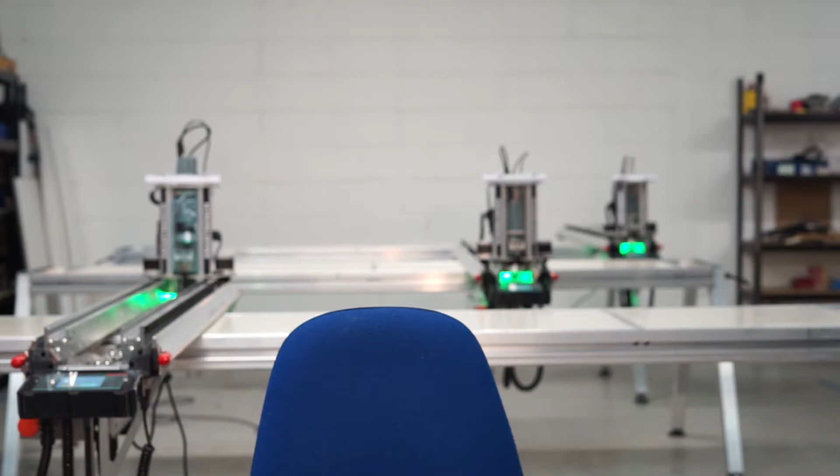Sorry, mate, I got your chair back on the mark. Is that about right? Yeah, that looks about right. Okay, it's the first time I sat down all day, you know. Right, let's go.

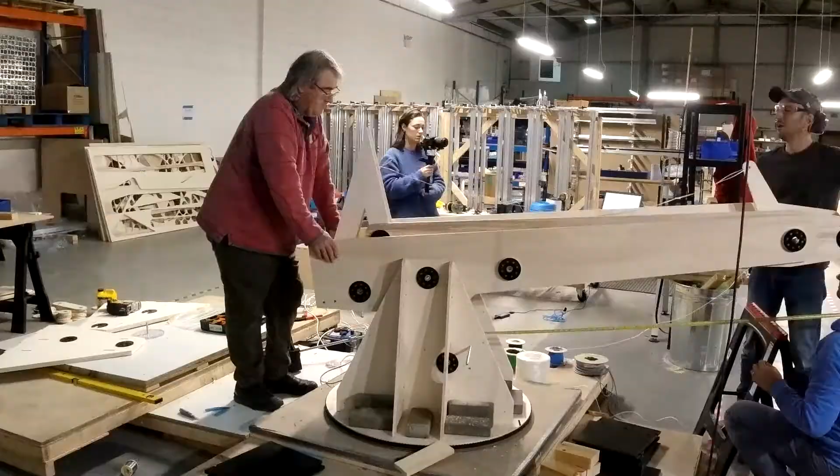My name's Ed, and I'm the technical director for Yeti Tool. That means I set the technical strategy and make sure it happens, and, you know, other businessy stuff. But I'm mostly here for the engineering, I love that bit.

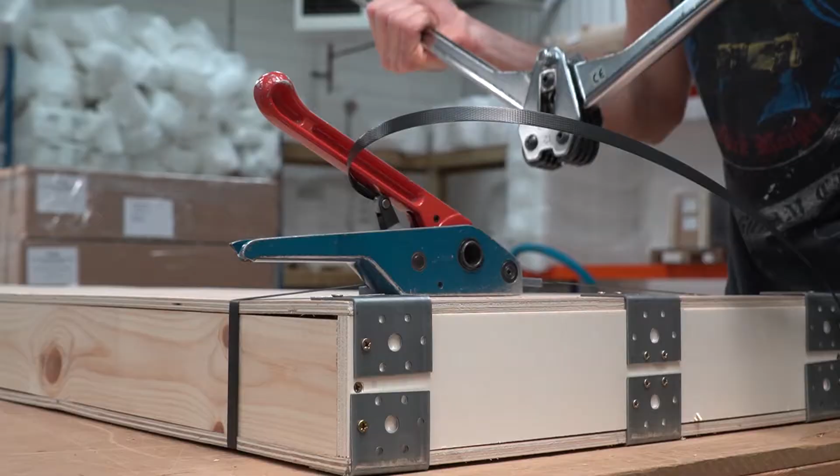We make a CNC machine called SmartBench, and we suddenly realized in October last year that we were about to make our 1,000th unit. So of course we thought, well, we'll have to have a party. We all eat lunch together, call it lunch club actually, and we just came out with the idea of the party and started planning.

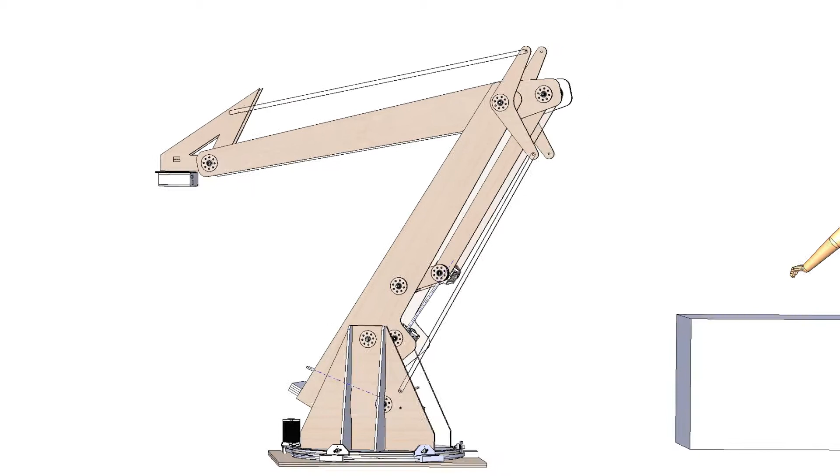We started imagining what we wanted at this party, and then I don't know how it came about, but all of a sudden we were talking about building this massive robot. Then of course the laser's got to go on top of it, and there's the DJ, so you need 2 robots now because you need one on the left, one on the right, and it just started getting out of hand really.

I remember thinking at that moment, we've had such a mission, everybody has, you know, getting through these last few years in the climate of everything that's going on. We need to have a bit of fun.

The biggest problem was that if I got this design wrong, there was a very real possibility that a big old robot was going to fall on one of my mates' heads. That was one problem. Second was, we only had a week to get it all done in and make them. We wanted 2 of them. It was huge. I mean, it was cool, but it did turn out to be one of the most stressful projects I've ever done with this company.

And was it fun? No, it wasn't fun at all. It was a really terrible idea. If you're ever going to have a big party and you get that urge to build a robot before it, just don't bother. Yeah, don't bother.

So a key design principle is I want to make everything on SmartBench, you know, CNC routed on our own machine. SmartBench can cut up to 2.5 meters long, so I'm thinking if we have 2 arms, then that could reach 4 meters. Now, if it can reach 4 meters, it can reach the tiles on the roof of my house. I'd be well happy with that.

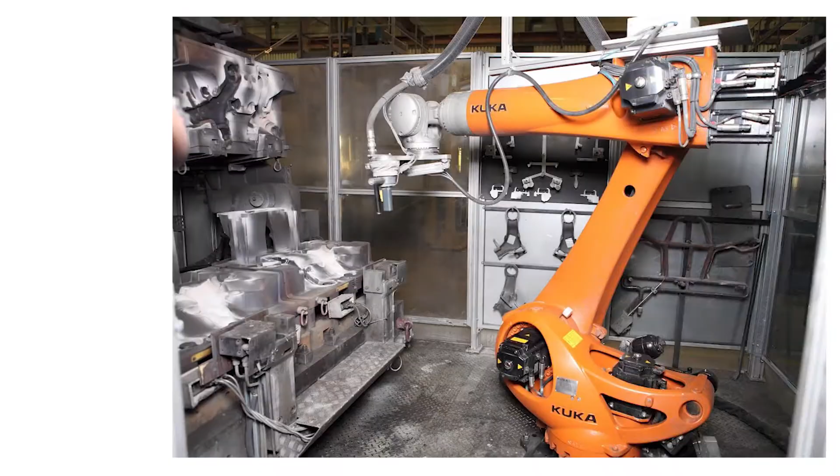I think the reason you don't see robots this big very often is because the bigger they get, the more expensive they get, and they get expensive really quickly. If you see the robots in a car factory, it's because they've got all these motors distributed around the arm. That makes them really heavy, so then they've got to use strong metal alloys to support the load, and then that gets heavier, and it just gets out of control. It gets expensive really, really quickly.

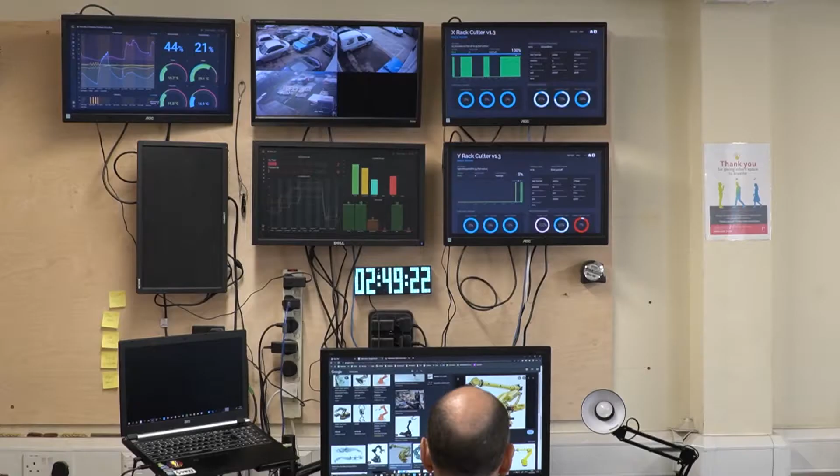So my job as the designer is I've got to deliver this and balance everything, but try and keep it as cheap as possible. It's a robot for a party at the end of the day, so the budget's not massive here. To be honest, at this point, I have absolutely no idea how I'm going to do the mechanics at this stage. And then it hits me.

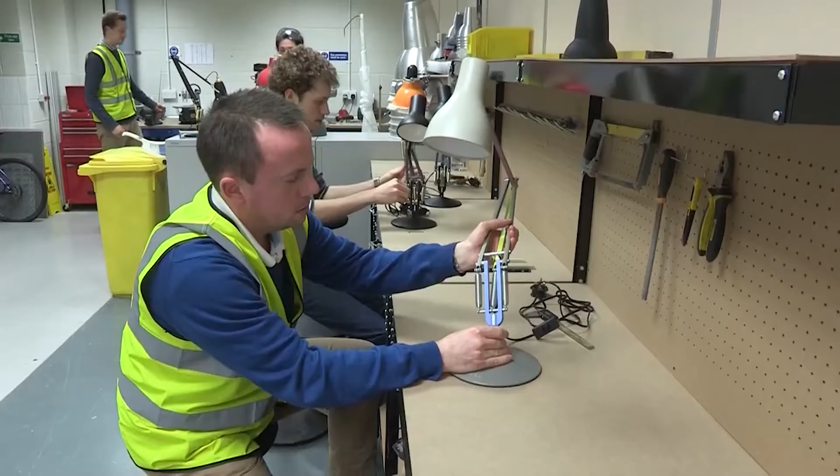I just see the Anglepoise lamp on my desk, and I think, yeah, I'll just rip that off. The Anglepoise lamp is quite clever. It was developed by George Carwardine - I think that's how you say his name - but it was in the 30s. He was a Brit, he developed it in Bath. Effectively, it's very efficient because instead of having all these actuators off on the arm, it puts all of them down at the base, all the springs right at the bottom.

And that's good because now they're not on the levers, which keeps all the weight down. So all we have to do is swap out the springs for motors, that'll move it up and down, put it on a big bearing so the whole thing can spin around, and make it 10 times bigger. Easy. It's so not easy. Back to the design - when I'm designing, I've got these basic principles in mind.

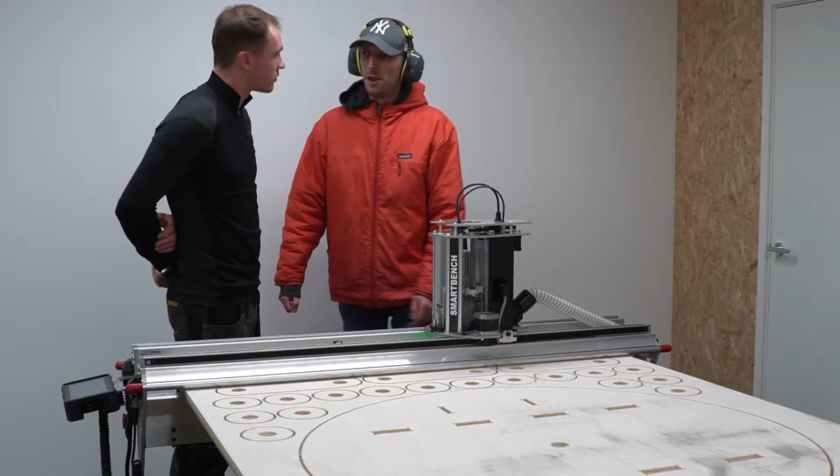The whole structure, I want to make it out of poplar ply. It's available in large sheet format and it's very light. The only downer is it's weak, you can snap that off easy. So I have no idea whether it is actually going to collapse or not until I actually do the design.

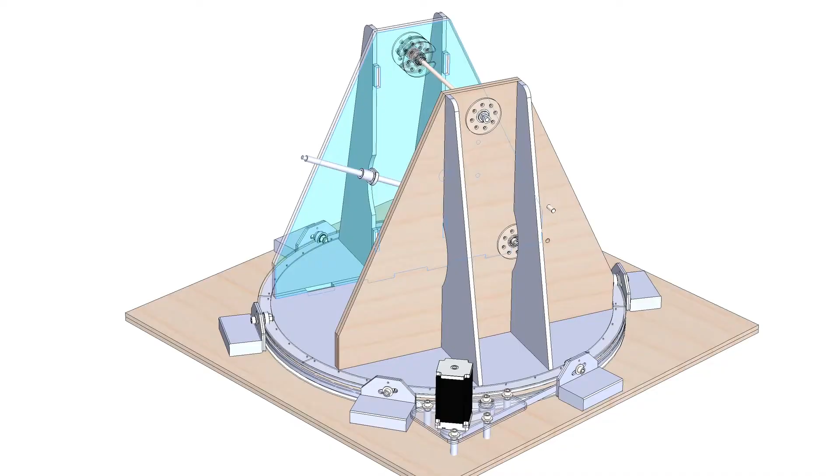We'll see, I guess. For the design itself, we've got 4 axes. The one at the bottom is spinning the whole robot around. Then you've got another axis lifting the lower arm up, and a third axis lifting the upper arm up. And finally, one at the top spinning the laser around, which counteracts the slew bearing at the bottom, so the laser's always pointing at the crowd.

When I'm designing stuff, and it must be the same for everybody, I just have this fear of it breaking all the time. And the biggest weak point for me is the pivots. So you've got all the weight of the arms trying to shear through the wood, and I don't know how to cope with it because the poplar ply is weak.

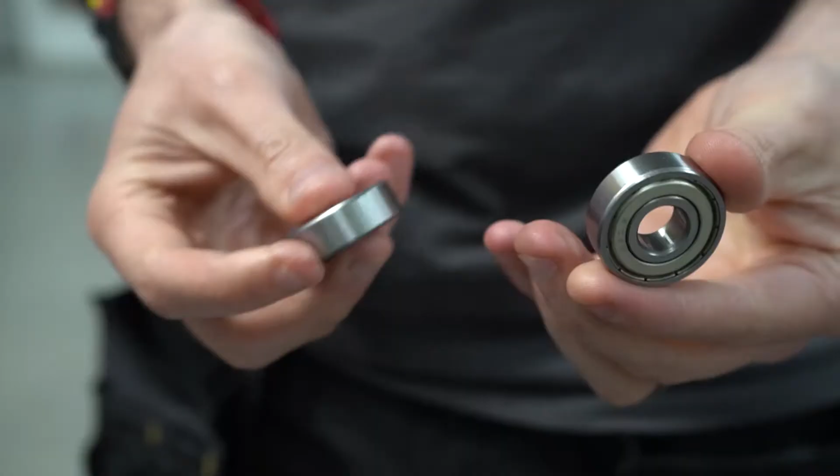So what I go for is some large bearings, which are massively overrated. They take M12 bolts, but the point is they help distribute the load because they've got really fat outer races. I think that's gonna work.

To drive the two lifting axes, I actually found these lead screws on eBay, and they're half a meter long. They've got ball nuts on them and tail bearings, and they're only 14 quid. Well happy with that. They'll massively gear down everything, so the motors are gonna easily be able to lift that load.

The only downer is I'm gonna have to design some quite tricky gimbals so that the lead screws can rotate and adjust. But I'll just stick some techno on, have a late night, zoning out to CAD. It's a pretty good night in.

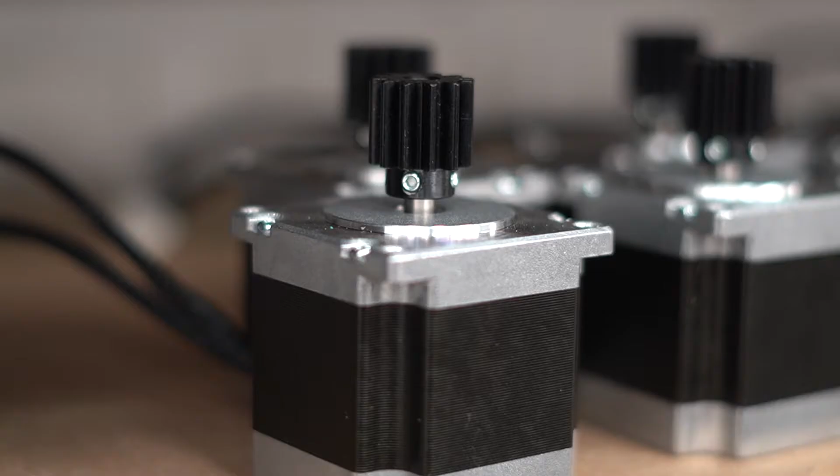On the end of the lead screws, we've got motors, but how big do those motors need to be to actually lift it up? I really want to use some NEMA 23s on the production line. We've got loads of them, but are they going to be enough? I don't actually believe the data sheets on how powerful the motors are going to be when they're put in conjunction with the ball screws.

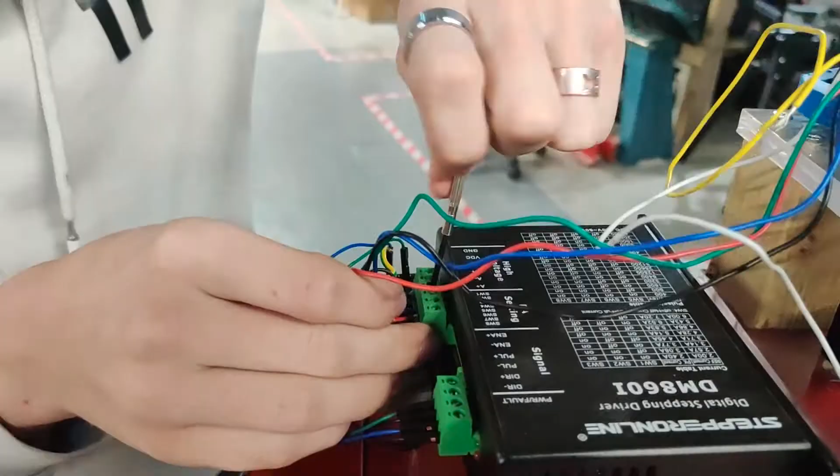And what I don't want to happen is we put this thing together and then the whole robot just doesn't move. So what we're going to do is build a load test rig. We're going to put our motor together with our ball screw and see how many kilos it can lift. We coupled the motor to the lead screw, and on the lead screw you've got the ball nut.

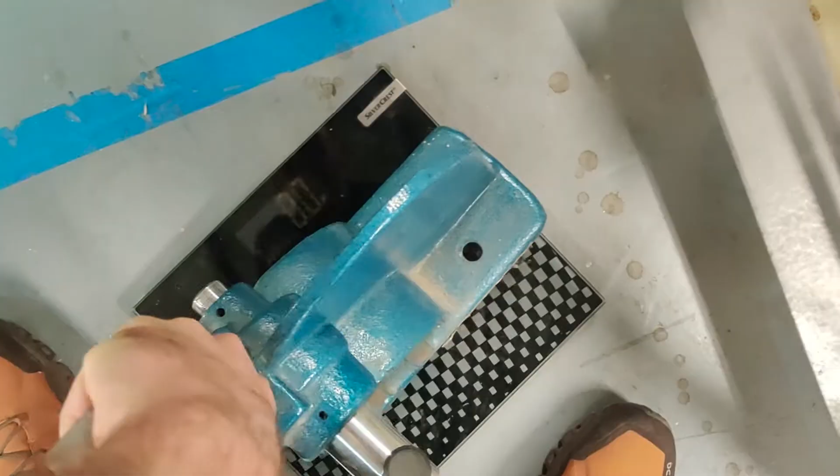We tied a bag to the ball nut, then we wound the lead screw, and that lifted the ball nut and the bag. We kept on adding weight into the bag until it stalled out, and when it stalled out we knew that was it—that was how much weight it could lift.

We tested the NEMA 23s. They actually did really well, 40, 50 kilos, something like that. But I did the calcs on how much we would actually need, and it came back at about 80 kilos.

So we then had to invest in the next size up motor, NEMA 34s, like proper chunky motors—you could move anything with these things. We plugged them into the test rig and just kept on adding weight. It cleared 100 kilos easily, and then the bag broke.

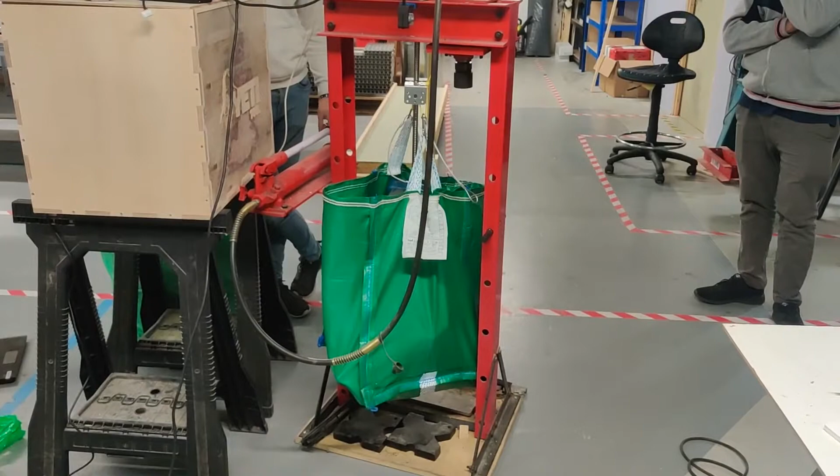Is the bag breaking? I've got no idea. Some of it broke. So we had a lot of confidence in these things, they were going to do it.

Anyway, that's testing, we don't have to talk about testing. Let's get to the design.

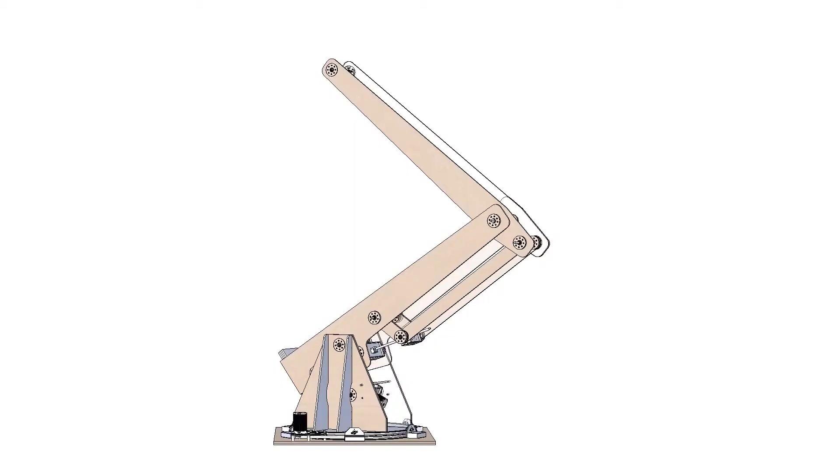The first part of the design challenge was actually the turntable. And that's got to do two things: it's got to let the whole robot spin, and it's got to not let the robot tip over, because nobody wants a 4-meter robot falling on their head.

The whole turntable's so big, the whole thing's just floating, which is why it can completely tip up and over. And as that lever, the arm, extends away from the middle, that's what's tipping it over. So I need to bring the center of gravity back into the middle of the base.

Because I really want to get this right, I give my mate AK a ring. He actually designs nuclear cranes for a living, so you know, can't go wrong there. He says that's actually pretty common in cranes. In fact, they're mostly on floating slew bearings, and industry standard is to get that center of gravity to within one third of the bearing's radius.

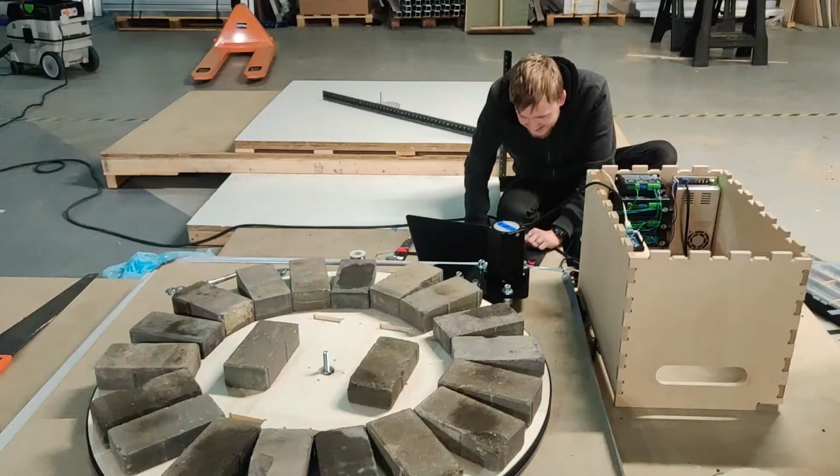So we can do that with counterweight, and in our case, that's bricks. Now we've solved that problem, it's time to make the turntable do what it was supposed to do.

You know, turn. So it's back to eBay, and I start looking around for anything I can use for the top turntable to roll on. I find that precision bearings are hideously expensive, but along the way I see catapult ammunition, which I suspect is exactly the same thing, just rejects from the production line. I got like 1,000 of these just to see if they would work. They're cheap, you know, why not?

Look, I don't really mind if they're off nominal at all. If you look at that, it's way off 10 - I suppose it's supposed to be 10. But if you look at all of them, they're all the same. Look at that, 9.5, pretty much on the money. That's fine, as long as they're consistent.

Ben, do you want to make a robot, mate? Let's go!

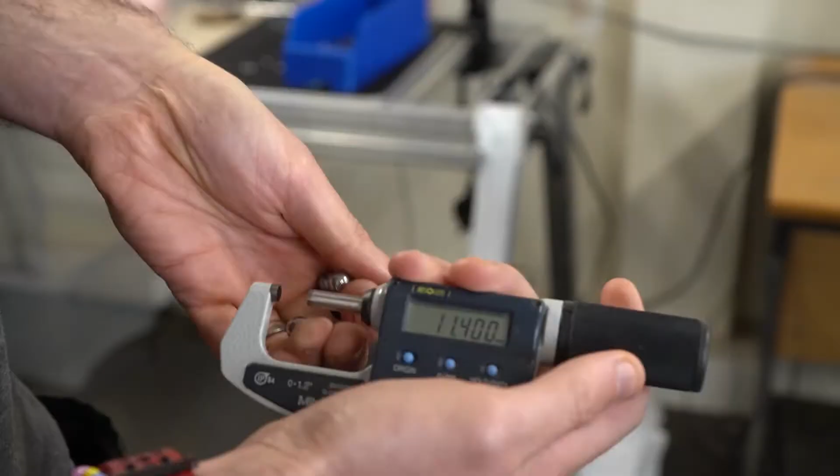So now I've got the balls, I want to cut some tracks into some acrylic. Now I've got the tracks, I can put the balls in the tracks, and then put the turntable on top of the balls, and now it can spin on the balls. So it takes all the weight, spins around, it's cheap, done.

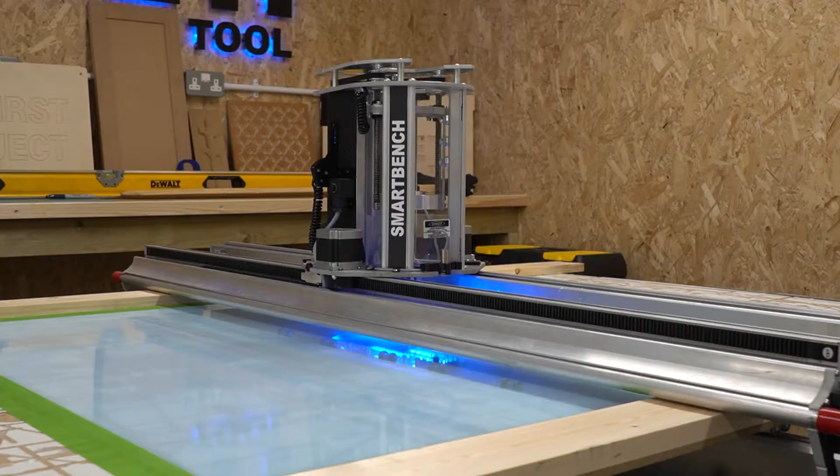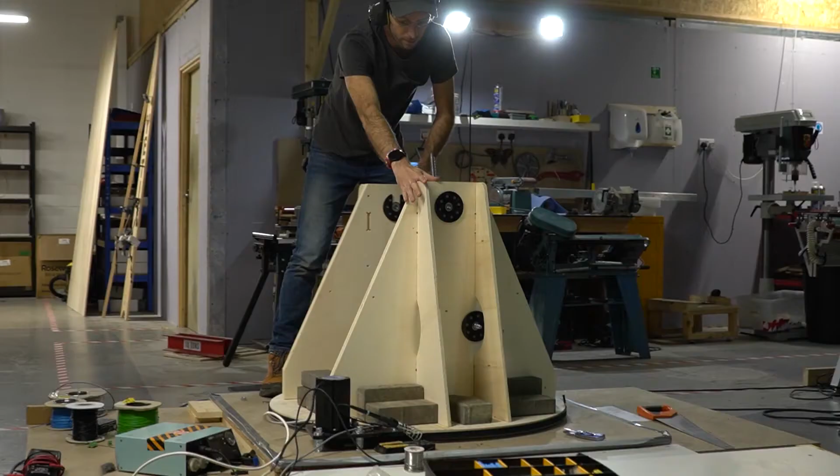A 12-hour day at slew bearing works, and I am so happy right now. Yeah, come on!

Every project has a pain in the ass moment. It turned out that the balls were a real pain. Halfway through testing, we noticed that a ball had jumped out of the track and was now sandwiched between the plates. That meant the whole weight of the turntable and the mass of bricks was now bearing down on that one ball, which meant the whole thing could seize, and just that single ball could tear everything off.

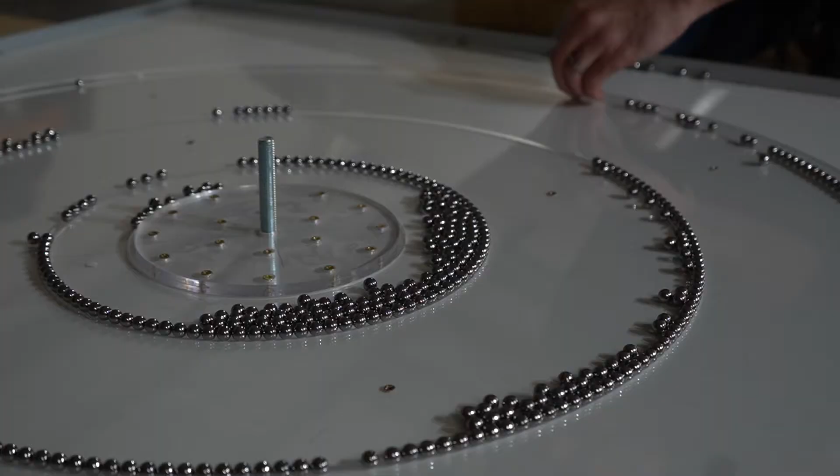We rebuilt it. I don't know what it was - whether it was the dust kicking the balls out of the track, or the mediumly violent assembly of us putting it together, I don't know - but we did it a few times and it just kept on popping out.

And then the final nail in the coffin for me was realizing that we've got to move these robots from where we were building them to the dance floor, and there's just no way they would have stayed in the track. So after all of that, it took a while, but I had to accept defeat and completely rip it up and start again.

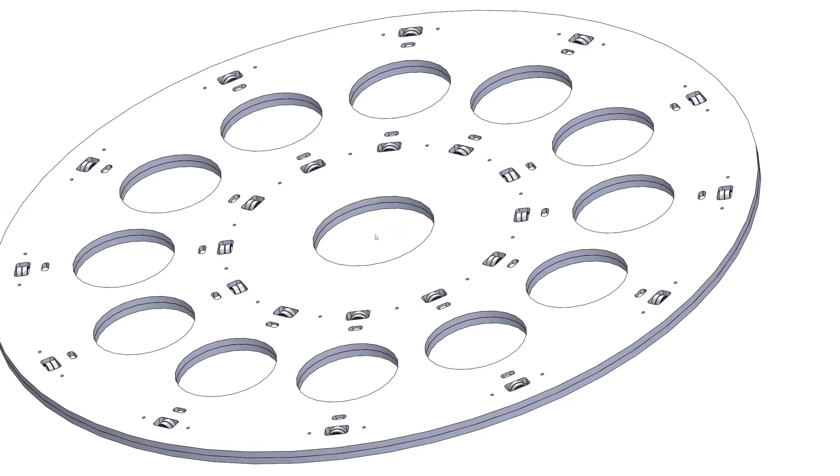Luckily at this point, Martin has a great idea, which is we use bearings instead of balls. Throw the balls away, just use bearings. And we have an intermediary plate which holds onto the bearings - we call it a spider - and as that rotates, it holds the bearings in place, which should work.

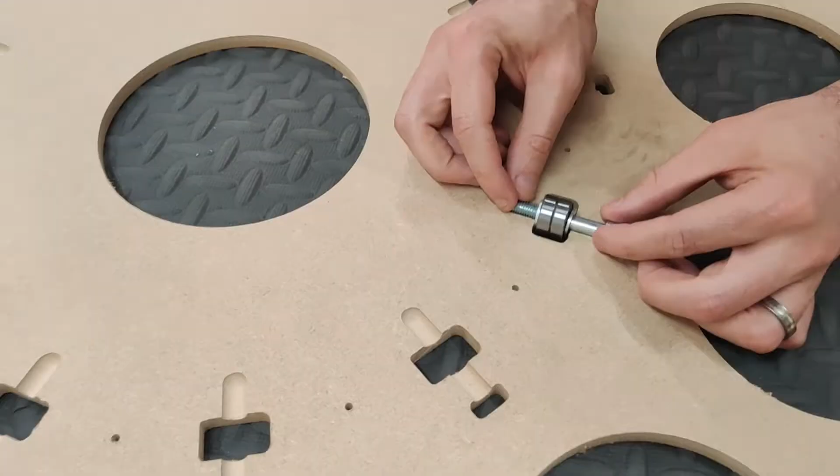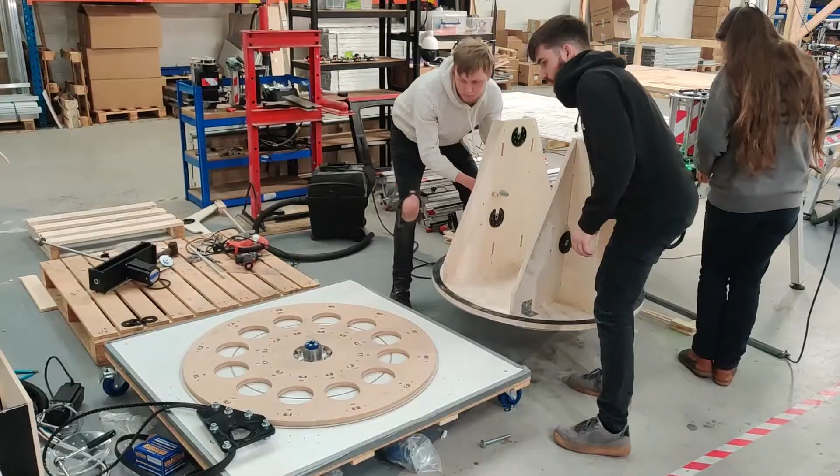So, take two. Right, they've come off lovely, and now I'm just going to test them. Yes, look at that, that's nice. We should just be able to pop this over on the top. Yeah, that's going to work. All right, turntable next, please. Yep, it's going to do it.

So now that's done, we can get onto the arm, the robot looking bit. At this stage, it's all about making the bits as fast as we can, because we've just spent a lot of time on the slew bearing. We don't have much time. We're starting to feel the pressure. We need to be cutting all the time, but we're not going to make it.

And I know I'm going to say this, obviously Yeti Tool and everything, but SmartBench at this point was amazing because it just churned the parts out. I mean, we literally could not keep up.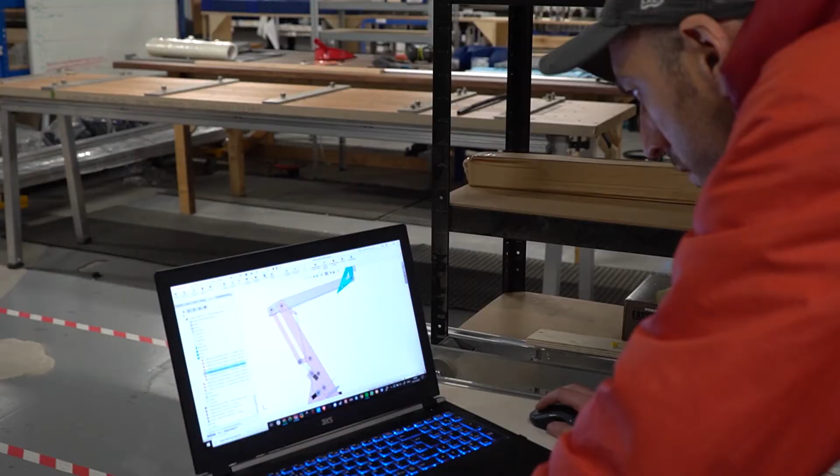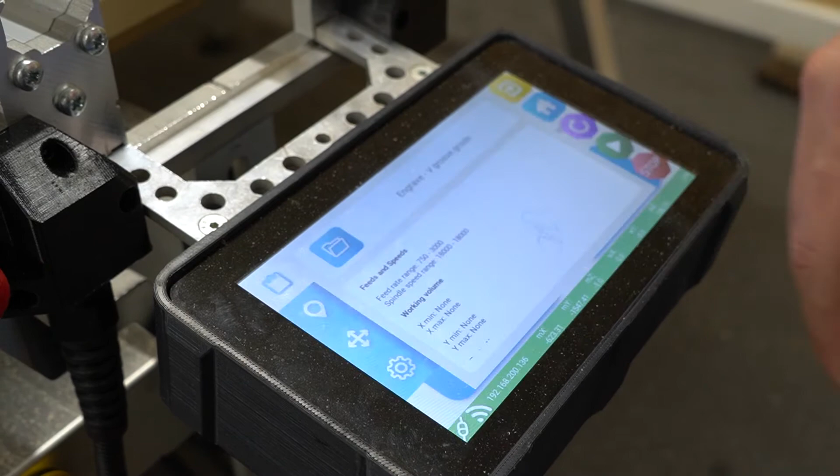The bit I loved was designing and using Smart Transfer. The workflow was: I'd finish a design, drag it onto Smart Transfer, and it would get pinged over Wi-Fi to the SmartBench, which was cranking the parts out. I'm using Smart Manager so he knows the quantities and tooling, it's all there. I don't even have to talk to him.

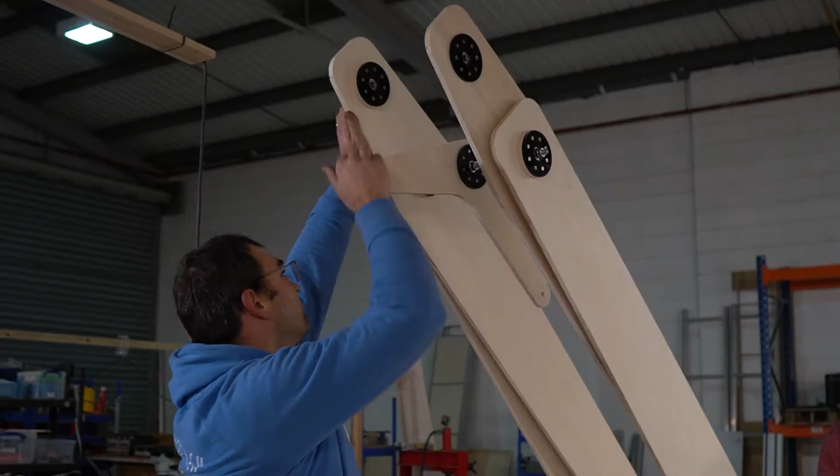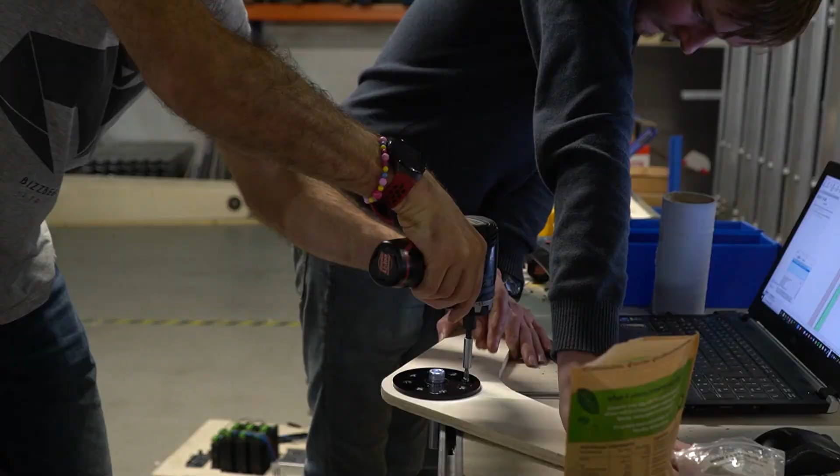Meanwhile the bits are coming into the build bay, and the guys can't keep up. We've got Rami, Benj, Dragos, Barry, Finn, Loz, all scrambling to get the sub-assemblies done. Everybody's pushing really hard, all day, all night, just trying to get these things together.

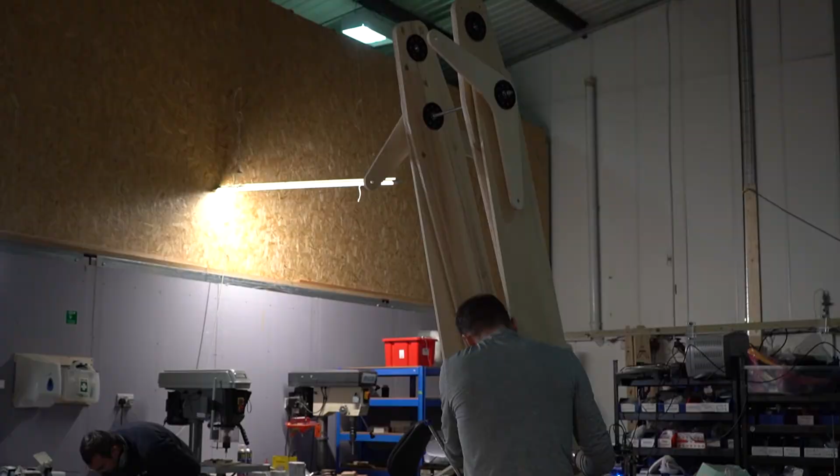It's building, it's coming together, and then we suddenly see this robot arm emerge, which we'd all been having in our heads for days. And then I hear this crack. It was one of my worst fears in the design.

I didn't know whether the poplar was going to take it. I knew it was weak. I guess I thought, well, we'll find out. But yeah, that noise of hearing the plywood starting to come apart, it was brutal, man. And we had to stop, strip it down, and work out what had gone wrong.

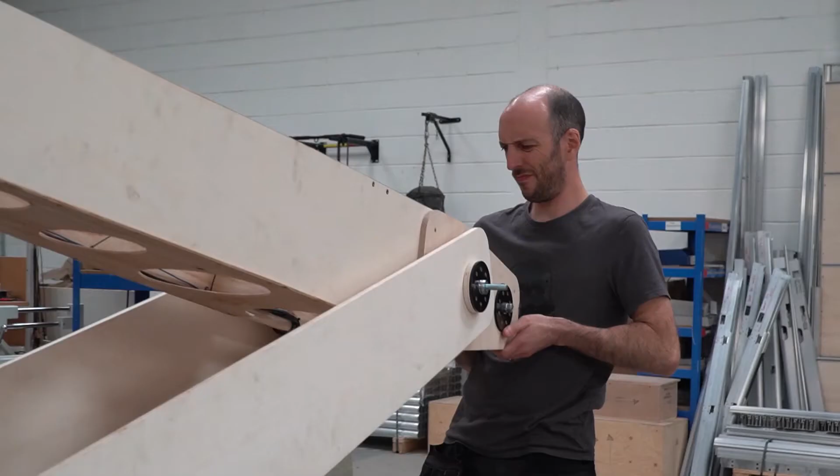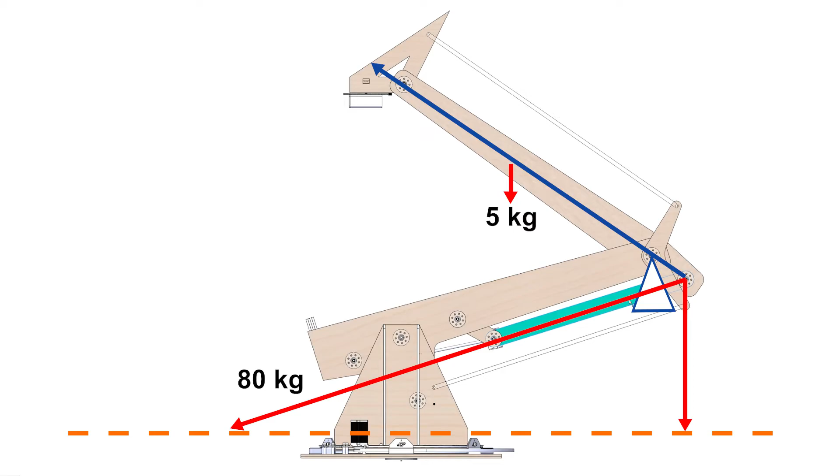I know where to look, and sure enough it's coming apart at the elbow tendon. There's a lot of force in that area. We've got a long arm which adds a lot of load, and a very short part of the lever, which means you need even more force to pull it up. To make matters worse, the tendon's at an angle, so the force pulling on it just gets more and more. Worst case we're looking at about 80, 90 kilos, and the poplar just wasn't up for it.

So we had to reinforce fast. I got to designing another couple of extra plates to reinforce it, and this time I'm using birch ply, which is much stronger than poplar. It's a lot heavier, but it's worth the weight. We glue these new reinforcing plates back in, and then rebuild the whole robot again.

We lost a lot of time. No, there is no way we're going to get this done. Absolutely no way at all. Starting to get unbelievably tired, unbelievably tired. So we're running out of time. It's midnight now on one of the last nights.

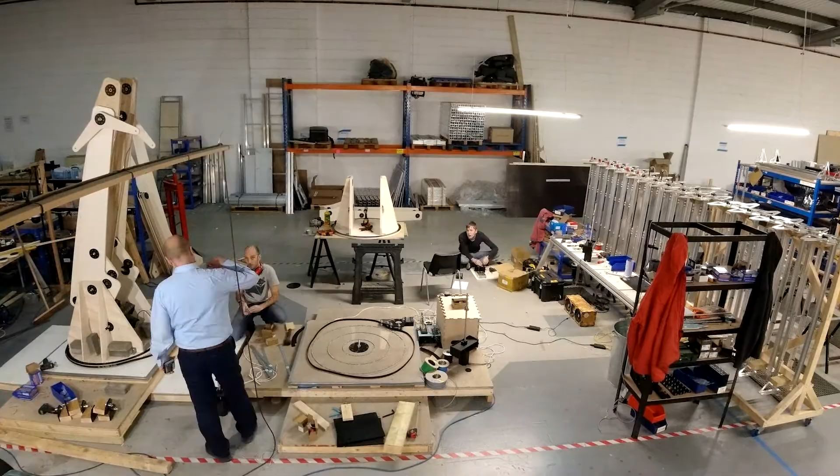I guess in every project there's always a bit of a low. We'd just been running, exhausted. I remember sitting on the kitchen floor, realizing we had a whole other robot to make, and I got this feeling that I was just pushing us all over the edge of a cliff. How on earth were we going to build the second one?

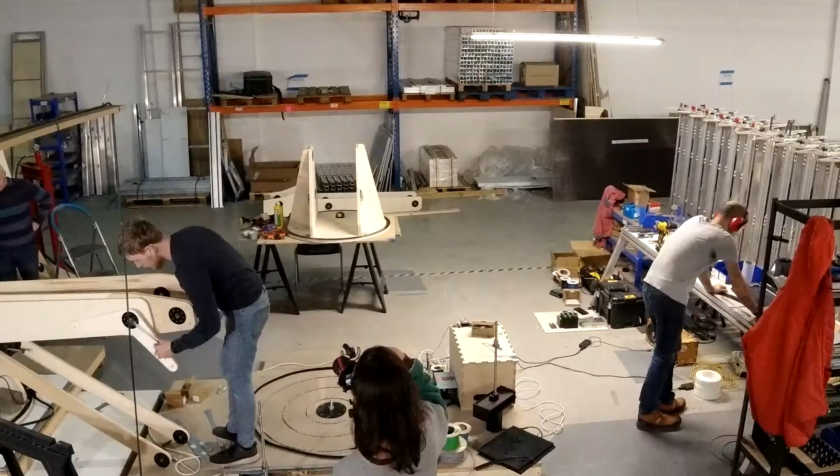I just said to everybody, what do you want to do? Because I don't think we can make two. And everybody said, no, we're making two. I was so proud of everybody. So we just cracked on. And actually I'm so glad we did, because that second robot was easy. We'd done all the problem solving with the first one, so we knew what we were doing. We didn't have any redesign. Did it in about half a day.

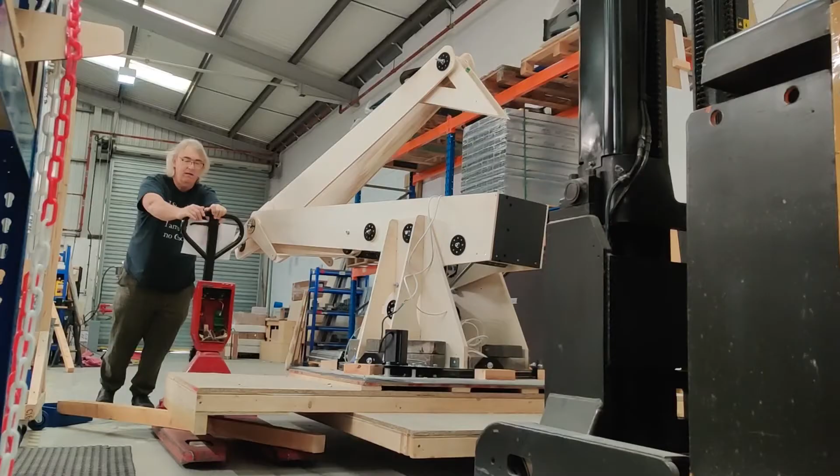So it's the day of the party now, and literally nothing else is done. Somehow we've got to move all the robots into position. To be honest, I don't even really remember how that happened, it's a bit blurry. There was a lot of squeaking and dragging noises when we got there, I guess. I didn't think about it at all, actually, if I'm honest. That was lucky. Right, well done everyone.

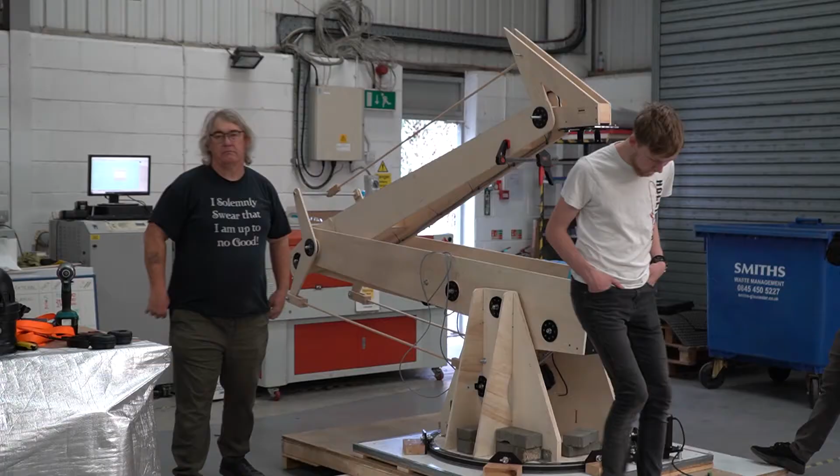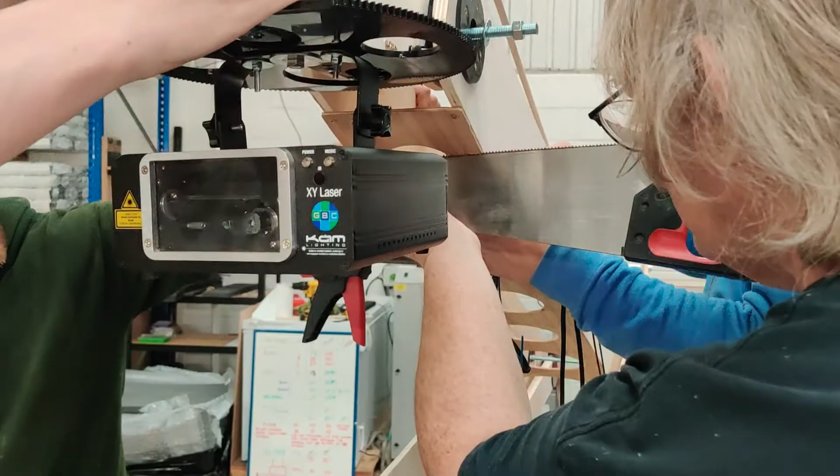Let's do robot two. That's then followed by, we've got to fit the laser to the head. That was pretty cool actually, I was quite pleased with that. We used a rack and pinion system which would allow us to swivel the whole laser on top of the robot.

And then we put the signal cable all the way down the arm, through the dance floor, out to the back, up to a laptop. So we could control both the robot and the laser from one laptop at the back of the dance floor, which was great.

That was like a dream. Now we can get these things moving and see what they can do. If they can do anything.

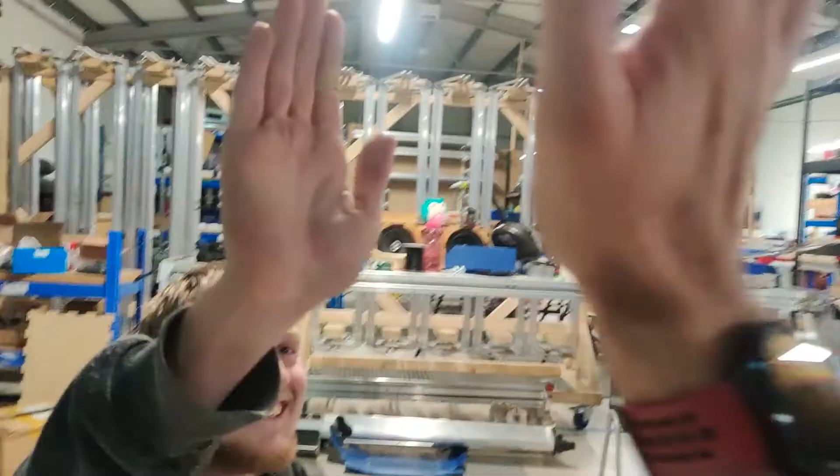So Benji, we've not talked about Benji at all, have we? Right, so Benji is kind of like my partner in crime on this project, and he's in charge of all the motion control. He's got to get this thing moving. I thought the mechanics was hard, but actually getting it moving's tricky. But the poor guy, because we spent all the time on the mechanics, has had literally no time to actually do his job. We've got barely no time left, and this is his time to shine.

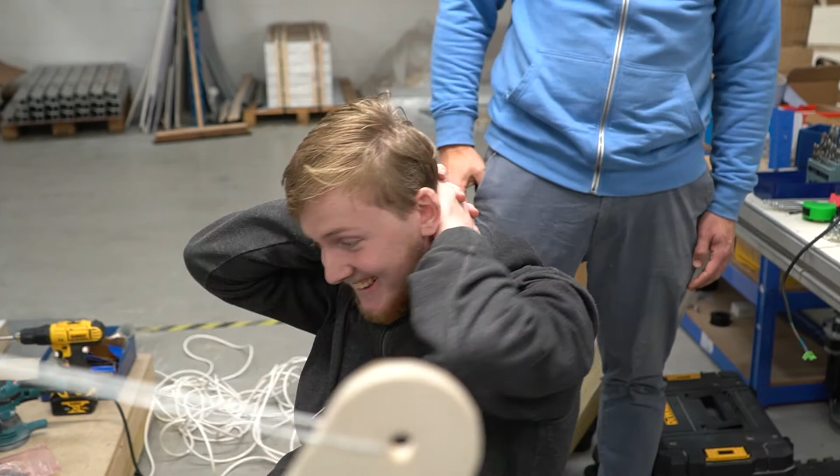Oh my god, we have a solution. Oh, what have we got? I've got two Arduinos driving two motors at the same time from the same G-code command. How did you do that? Duplicating the COM ports. Our control, by the way, for the geeks, is very similar to how we run SmartBench.

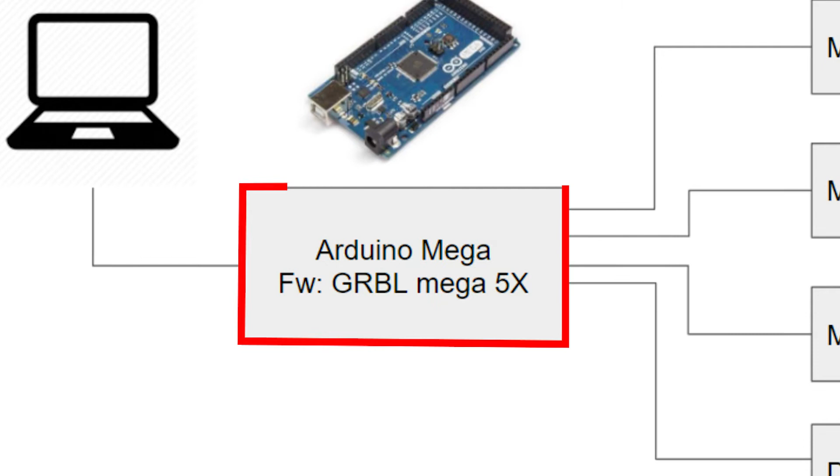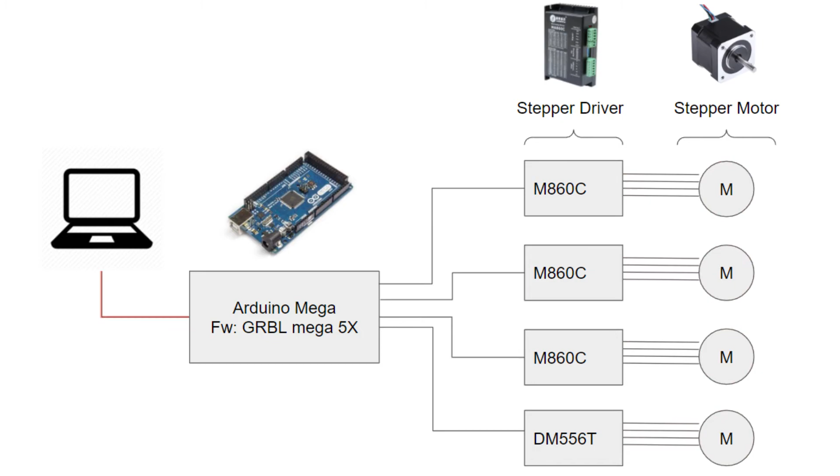So it's an Arduino running a more advanced version of GRBL, and that is firing off all the steps to the stepper drivers, which moves the motors. We control the whole thing through a live USB connection. And to cut a long story short, that means we can move all the axes together at the same time, just with a simple line of G-code.

Bench does a cracking job at getting all of this together in next to no time. So thanks, Bench. Soz Bench.

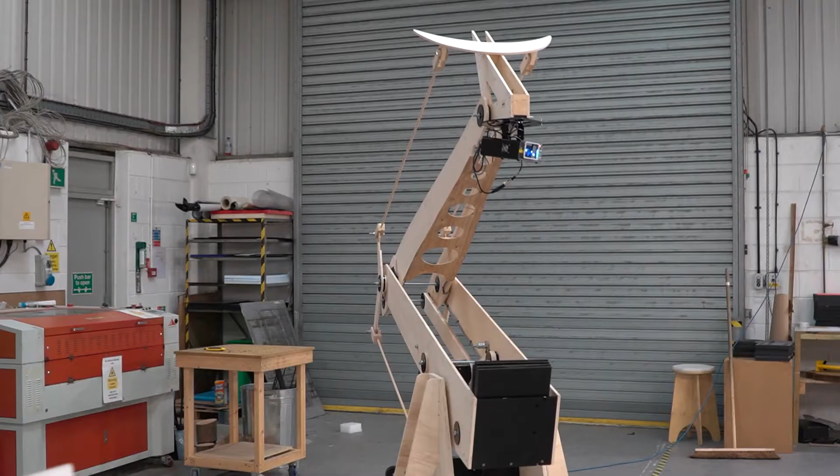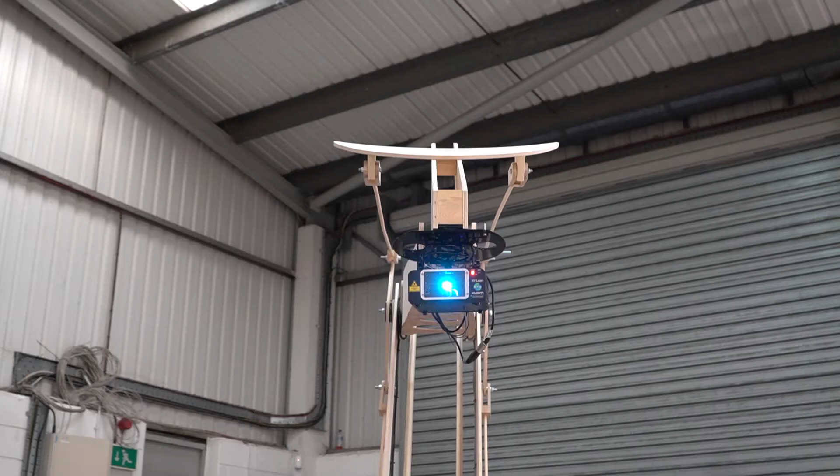And then we switch it on. And for me and Bench, this is a really special moment. I think when you do any project, you spend so long investing your imagination as to what it's going to look like, and until it's actually there, you don't know how it's going to feel, but you hope it's going to be good. And when these things start moving, they start moving at the same time in synchronization, and we're both just pumped because we're wired.

This is everything that we'd imagined. And we've got two massive robots, 4 meters high, doing everything that we imagined they would do. And the sound they made was just, everything was there. It was a moment. It was a real moment.

And then all of a sudden, people started turning up for the party. And we were like, oh yeah, totally forgot about that. At that point, we'd done everything that we could, and we got the lasers on, we got all the sounds sorted out at the same time, and it was lights out, lasers on, good times.

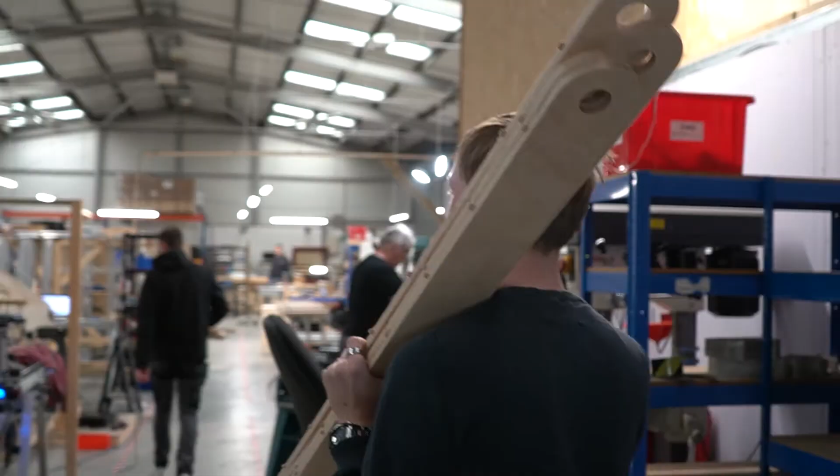Looking back, this was an amazing project. It was super intense having the party deadline, and we had bitten off way more than we could chew, but it didn't matter.

We had a vision as to what we wanted to do, and seeing the robots just casting that laser light out over the dance floor, I think we nailed it. To be honest, pulling it all off in the time that we had, that was half the achievement.

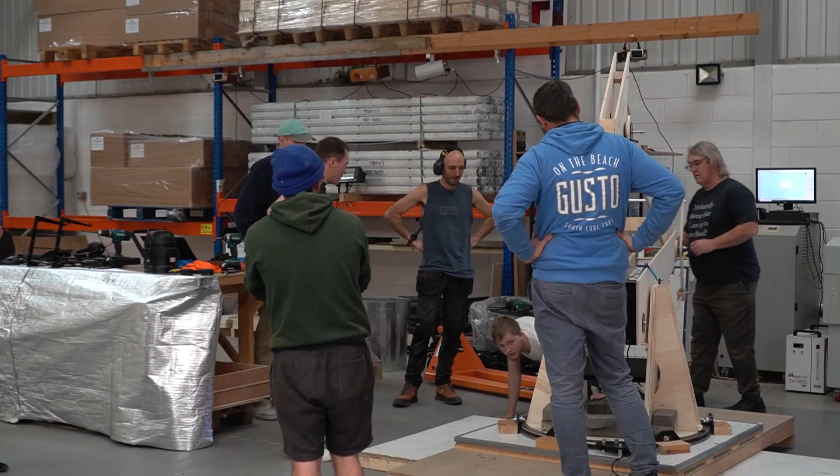It sounds cheesy, but there's no way we could have done it without a massive team effort from the whole of Yeti Tool, that's for sure. And there were some amazing efforts. Martin, that's Lizzie's dad, he doesn't even work here, by the way, but he turned up for a week and just did carpentry. What a legend. And the party was good fun.

I was pretty pleased with the design at the end of it. I think it was one of the coolest things that we've made in a while. And in fact, there was a real moment at the end when we had to break the party down.

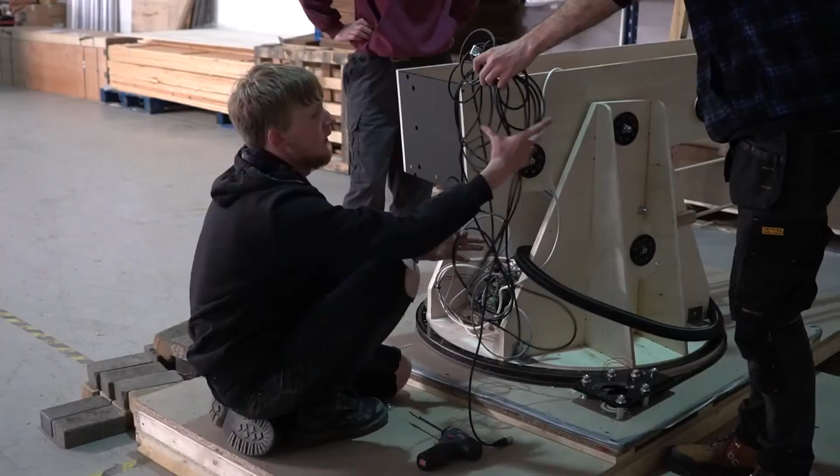We had to pick them up and wheel the robots out and put them in a container and lock them up, and we were all a bit sad about that. Yeah, I genuinely missed them. They were part of all of us that night.